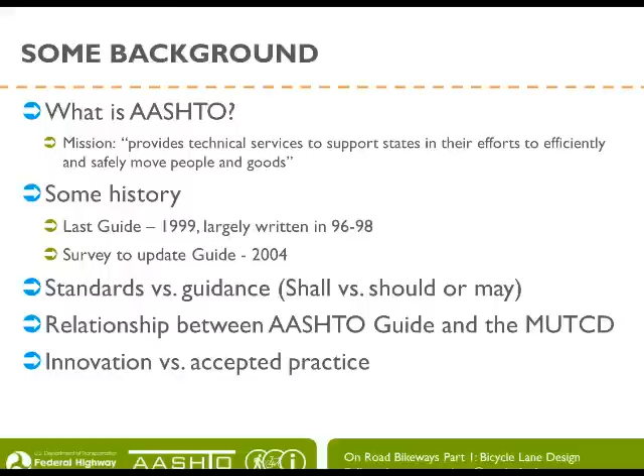So it's really important to note that the bike guide is guidance as opposed to a standard. The bike guide does not use words like shall, it uses words like should or may, and that's a very important distinction. The AASHTO guide also is closely linked to the MUTCD, and it's very important that the AASHTO guide does not get out in front of the MUTCD and instead refers to devices that are already included in the MUTCD. And finally, it's also important to note that due to the nature of AASHTO, it's important that the guide apply to a wide variety of contexts.

So we can also look at how the Bike Guide relates to other manuals. As I mentioned, signs, signals, and pavement marking information in the latest edition of the MUTCD related to bikeways have been incorporated into the 2012 AASHTO Bike Guide. So those two are compatible.

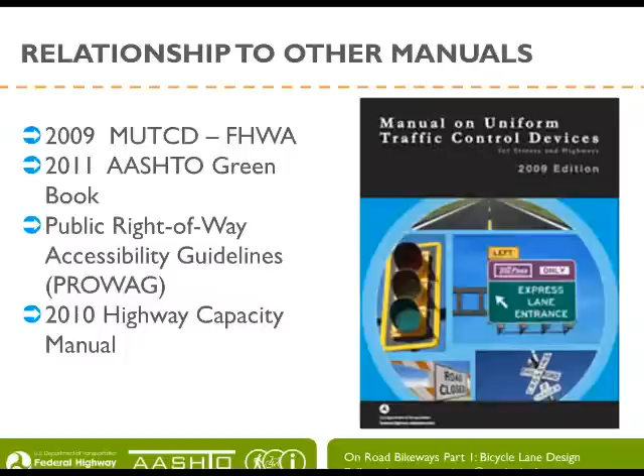The AASHTO Green Book in general refers to the Bike Guide for bicycle-specific guidance. In terms of accessibility, the new PROWAG guidelines have also been incorporated into the 2012 Bike Guide. And the Highway Capacity Manual includes new multimodal level of service, including bicycle level of service, that is also reflected in the Bike Guide.

So another question is, how does the AASHTO Bike Guide relate to the NACTO Bike Guide? I'll make a couple of points. The first is that the AASHTO Guide is a comprehensive manual. It covers all aspects of bicycle planning and design, both on-road and off-road bikeways, including fundamental operating characteristics of bicyclists and geometric design. The NACTO Guide is not intended to be a comprehensive guide for geometric design of bikeways.

Just one example of the difference is that the AASHTO Guide explains in detail how to calculate stopping sight distance for bicyclists. The NACTO Guide does not include this. And calculating stopping sight distance is a fundamental operating characteristic that any engineer must know in order to design a bikeway, including innovative facilities like cycle tracks.

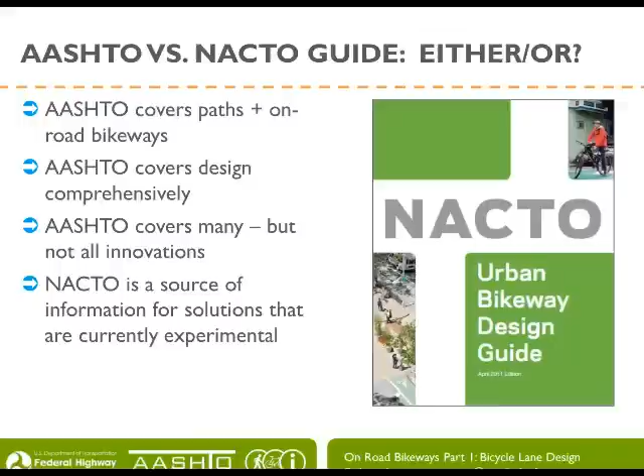Rather than focusing on all types of bikeways, the NACTO Guide covers certain types of on-road bikeway designs, specifically bike lanes and other new and innovative types of on-street bikeway treatments. The NACTO Guide does not cover shared use paths, signal design, and many other relevant topics. So it's not really a question of either or. Cities looking to build innovative bikeway designs correctly should use both guides.

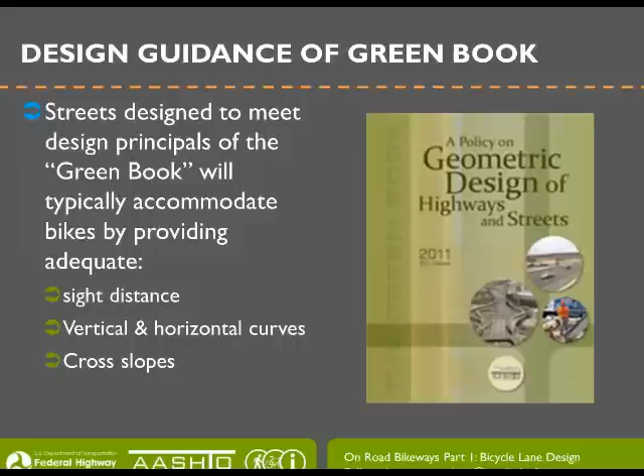Just a quick reference to the AASHTO Green Book: streets that are designed to meet the basic design principles of the Green Book will generally accommodate bikes by providing adequate sight distance, vertical and horizontal curves, as well as cross slopes. That's the picture of the cover of the current AASHTO Green Book.

I just want to give a few basic definitions that we'll be referring to, where the Bike Guide draws from the MUTCD. These definitions are important for our discussion today on bike lane types.

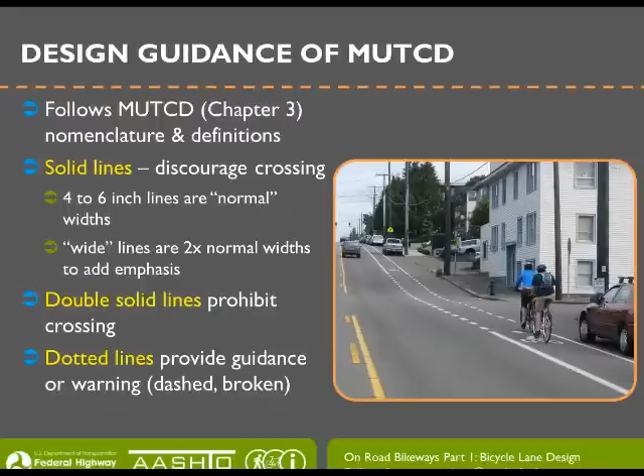So I want to talk about the different types of lines that we use to design bike lanes with. Solid lines discourage crossing. Generally, their 4 to 6 inch lines are considered normal width. Wider lines are generally 2 times normal width, and they can be used to add emphasis. Double solid lines prohibit crossing. And then finally, dotted lines provide guidance or warning where crossing may occur.

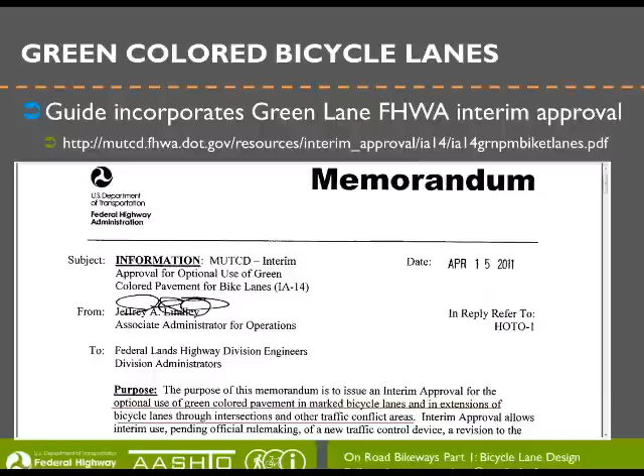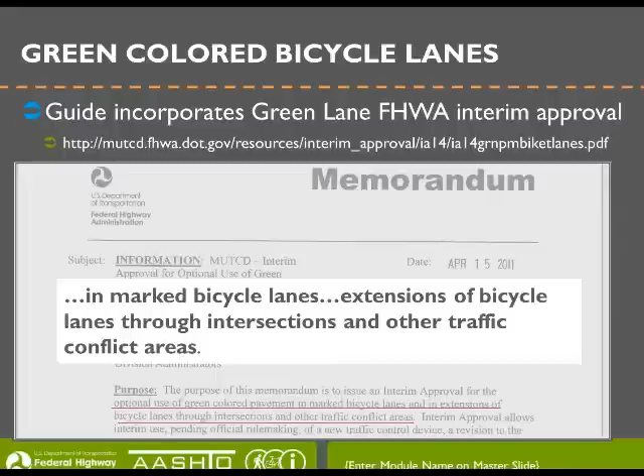A quick mention of green-colored bicycle lanes. The AASHTO Bike Guide, in addition to including items in the MUTCD, also includes items that have received interim approval from the FHWA, and that includes green bike lanes. This is a screenshot of the memo giving interim approval to the use of green color in bike lanes. It notes that in marked bicycle lanes, and extensions of bike lanes through intersections and other traffic conflict areas, green colored pavement may be used. That's an important note that the AASHTO Guide includes green colored pavement, and we'll talk more about that use in a moment.

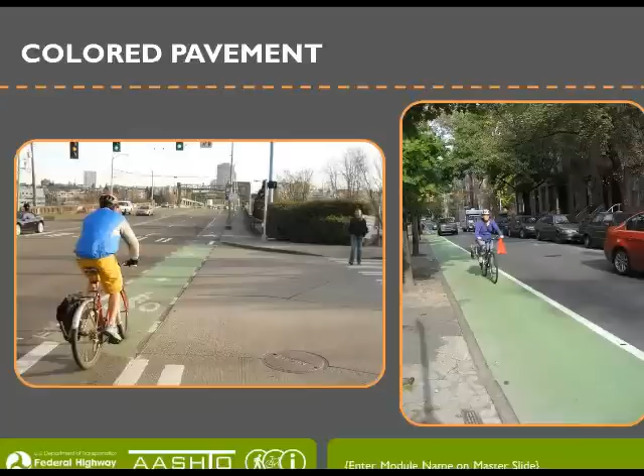So here are two examples of how green colored pavement can be used. On the left, we see the use of green pavement to highlight the extension of a bike lane through an intersection where there are conflicts. On the right, we see a full bike lane drawn in the color green, which can be useful where there is a concern about parking in the bike lane.

I'd like to give a summary of the major content changes in Chapter 4, with a focus on new bike lane content. The guide includes extensive discussion of the value of bike lanes. There's also much discussion of determining bike lane width and the nuances of when to use different widths, which we will go into detail later in the presentation. Climbing lanes are also included, along with a discussion of on-street parking, intersection guidance, as well as retrofit strategies.

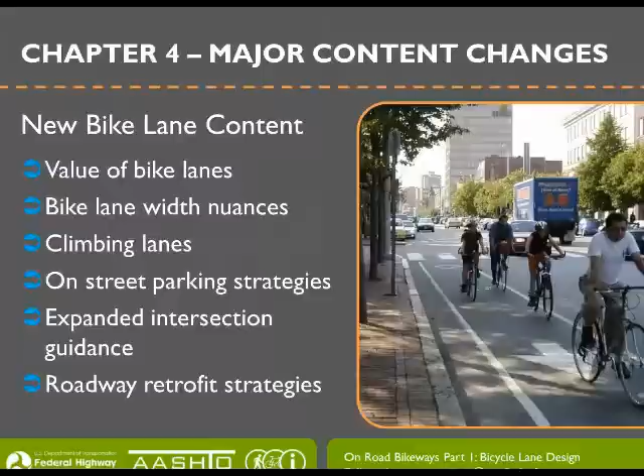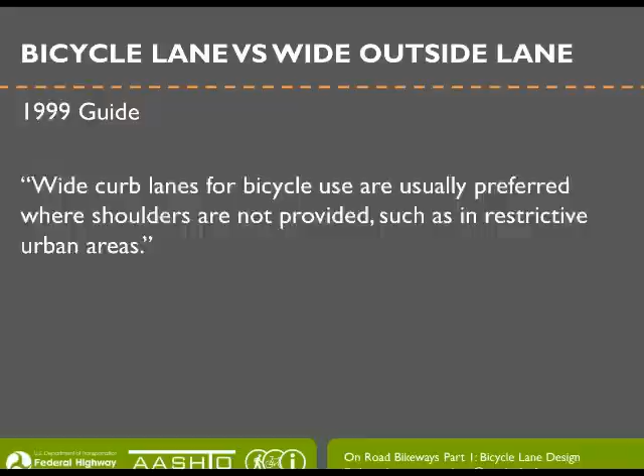So one important change I'd like to highlight regarding bike lanes: the 1999 guide included a statement often seen as a stated preference for wide curb lanes over other types of facilities. Compare that to the current guide, which includes two statements. The first recognizes that wider curb lanes can often increase motorist speed, which can be detrimental to level of service for both bicyclists and pedestrians. It also states that bike lanes are the appropriate and preferred bicycle facility for thoroughfares in both urban and suburban areas. This is a significant change in the guide.

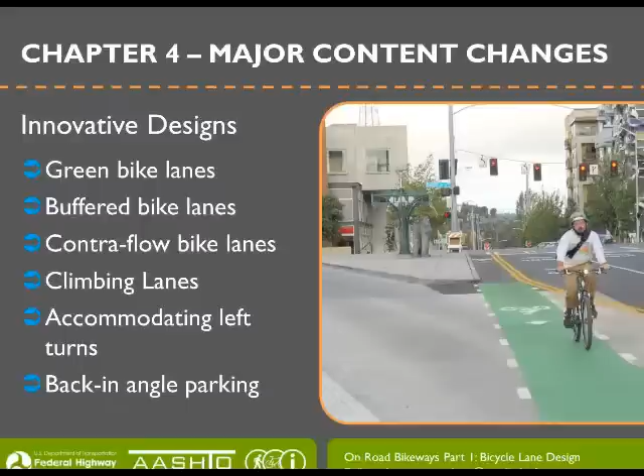Some of the major content changes in the current bike guide include other innovative designs. I've mentioned green bike lanes. It also includes discussion of buffered bike lanes, contra-flow lanes, climbing lanes, accommodating left turns for bicyclists, and designing bike lanes around angled parking.

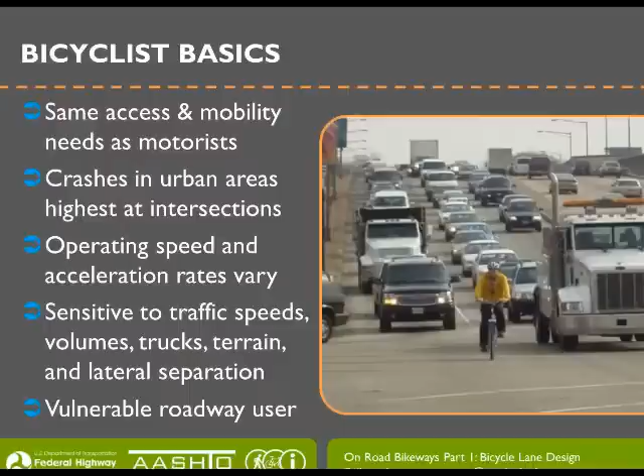The chapter begins with a discussion of some of the basics for bicyclists and how that impacts design decisions. I want to highlight some key points the guide covers. First, bicyclists have the same access and mobility needs as motorists. We also acknowledge that crashes in urban areas are highest at intersections. Bicyclists vary in operating speeds and acceleration rates, differing significantly from other types of road users. They are also very sensitive to traffic speeds, volumes, and different terrain conditions, so lateral separation—the amount of separation from conflict—is very important. Finally, bicyclists are vulnerable roadway users, and that needs to be taken into account when designing on-street bicycle facilities.

Taking that information—some of the basics of bicycle lane design—bike lanes allow cyclists to choose their own operating speed. As mentioned before, they are preferred over shared or wide outside lanes. Bicyclists also prefer bike lane continuity, and finally, they are sensitive to adjacent traffic volumes and speeds. That sensitivity needs to be taken into account when designing facilities.

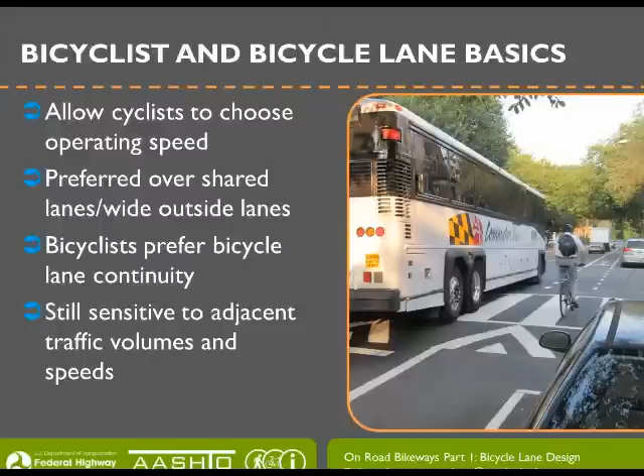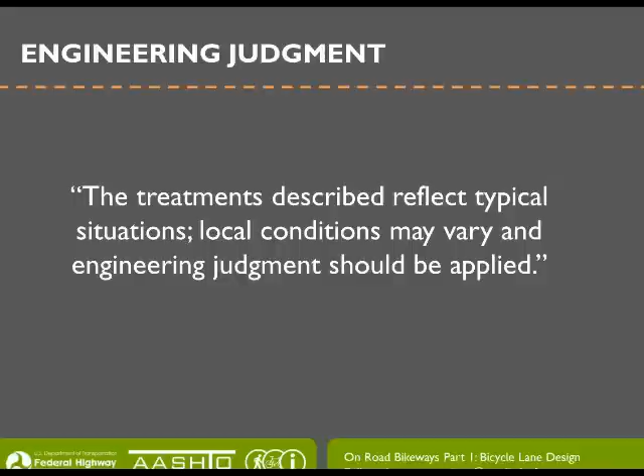It's important that Nick mentioned at the beginning that this is a guideline, not meant to be a standard. Any guideline cannot possibly detail out all the various scenarios encountered in the real-world roadway environment. As such, engineering judgment is critical to develop appropriate context-based solutions under a variety of situations. So the purpose of the guide is to provide overarching principles that, when you encounter unique situations, you can apply to develop unique solutions.

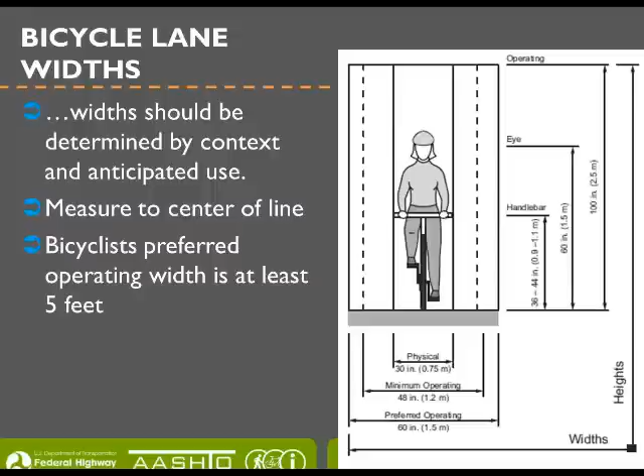The first and foremost question is the width of bike lanes. Width should really be a context-based decision, and the measurement is to the center of the line. The preferred bicyclist operating width is at least 5 feet, illustrated in this graphic from Chapter 2. It's important that the guide be read in its entire context, considering the operations of the cyclist and how they fit into the roadway environment. We discussed that chapter at the last webinar.

This is a new graphic in the guide, an update of the older graphic that just showed bike lane widths in various contexts. An important point here is that we're showing different dimensions for parking lanes and bicycle lane widths, reinforcing the notion that solutions should be context-based, and that it's not always necessary to have a 5-foot bike lane or 8-foot parking.

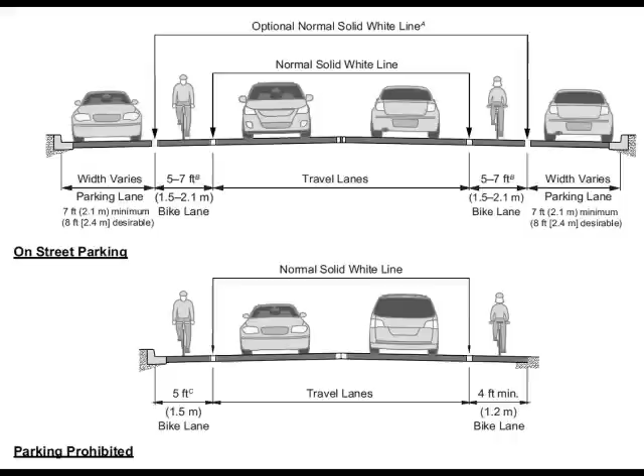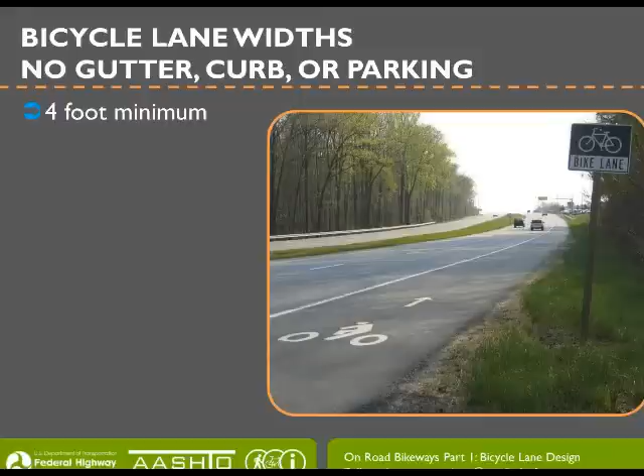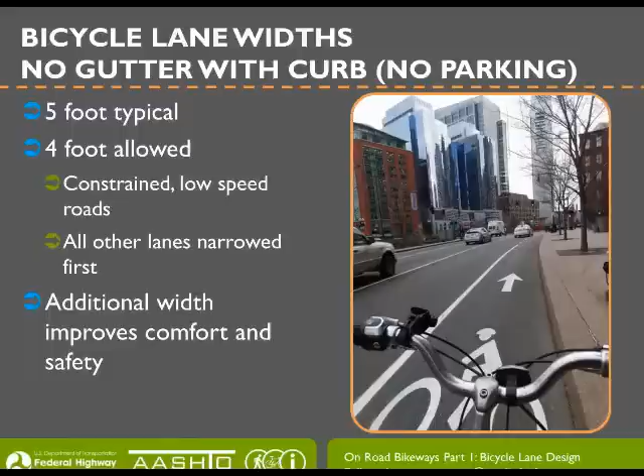I'm going to walk through the various scenarios you'd consider for bike lane widths. First, an open section roadway with no gutter and no curb—in those situations, the bike lane should be 4-foot minimum. Under scenarios where there's no gutter but there is a curb line and no parking, the bike lane should typically be 5 feet wide. Under very constrained situations where all other travel lanes have been narrowed, the guide allows for a 4-foot bicycle lane, again where there's no gutter line. The guide also makes frequent references to the value of additional width to improve comfort and safety for bicyclists.

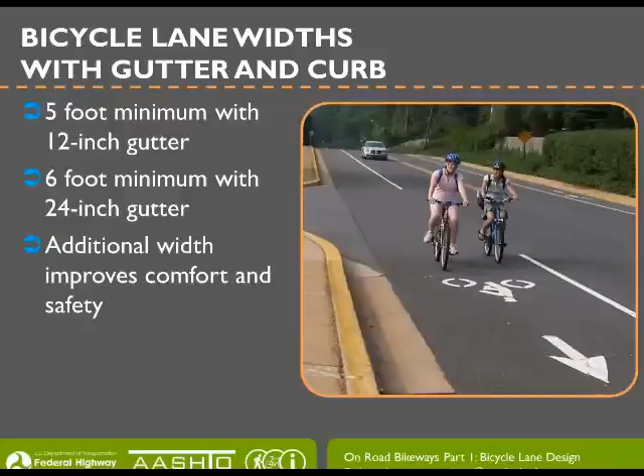The next iteration to consider is a bicycle lane against the curb where there is a gutter line. There are two common situations throughout the United States. The first is a 12-inch, or 1-foot, wide gutter pan—in that case, the guide recommends 4 feet of clear width to the left of the gutter, for a 5-foot total width measured from the face of the curb to the center line of the bike lane stripe. The second common situation is a 2-foot gutter pan, where the guide recommends a minimum 6-foot bike lane width. Again, additional width can be beneficial.

Whenever you have a bike lane against a curb line, there's often drainage structures and conveyance systems. The bike guide speaks to this in a couple of different sections, but as it relates to bicycle lanes, it makes a couple statements that it's important to consider that usable width between the gutter line and the bicycle lane stripe, and that usable width should be 4 feet clear.

It also talks a lot about the effect that a drainage grate can have on the bicycle rider, and that they may be inclined to swerve around it to avoid it, and that again is a reason for striving for a 4-foot clear width between the edge of the drainage grate and the bike lane line.

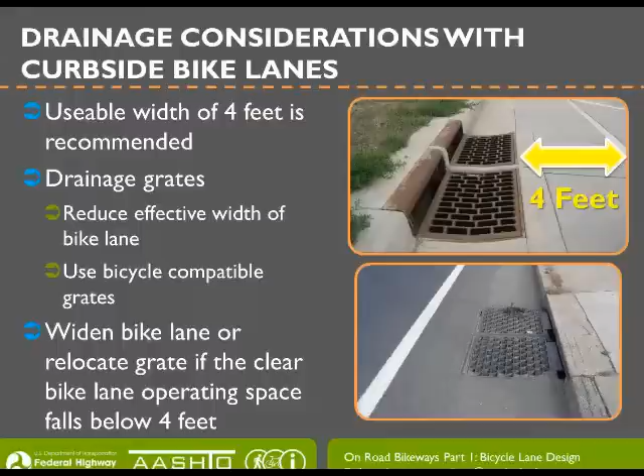And lastly, the critical point is to make sure that you have drainage grates that are compatible in the event cyclists do ride over them or have to ride over them. And in the event that you're doing some planning or design, it makes statements that every effort should be made to relocate drainage basins out of the bicycle lane or to retrofit the grate.

The next very common scenario is a bicycle lane adjacent to parking. For the old guide, the bike lane width at a minimum continues to be 5 feet, but now there's some additional discussion that I think is a little more clear than the old guide. The old guide allowed wider bike lanes, but it kind of referenced it in a non-direct manner.

Now it's a lot more direct in suggesting that 6 or 7 foot wide bicycle lane is preferable when you're adjacent to high turnover parking. It suggests that wider lanes are definitely important for the bicyclist safety, and that you can also narrow the parking lane to 7 feet.

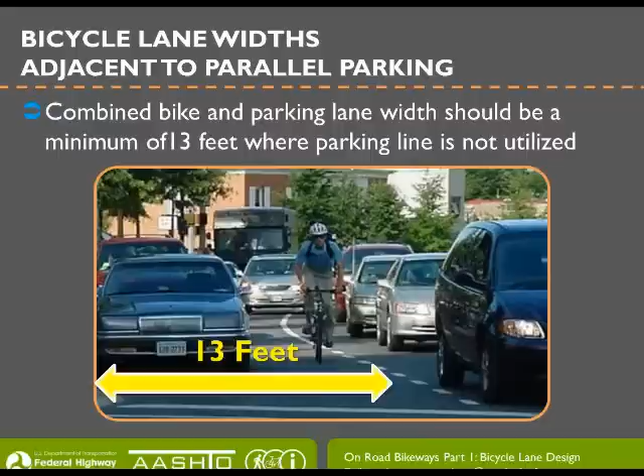A little bit of nuance with this is when you have a combined bike and parking lane where you don't mark the parking lane line, it suggests a minimum distance of 13 feet measured from face of curb to the center of the bike lane stripe.

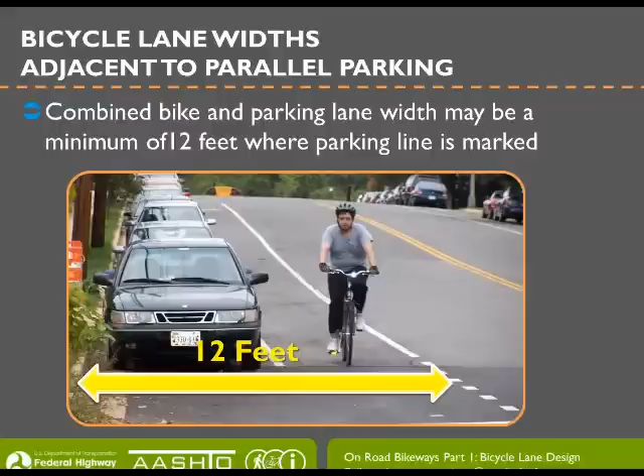In situations where the parking turnover is much lower, the bike guide still allows you to mark that line at 12 feet. It also makes an allowance for marking the line at 12 feet if you mark the parking lane at 7 feet.

The guide, for the first time, has some discussion relevant to dooring in narrow bike lanes next to narrow parking lanes. It's a concern that's of importance, especially in urban areas where it could be a crash type that can cause serious injury or even fatalities for cyclists when a motorist opens their parked car door into a moving bicyclist.

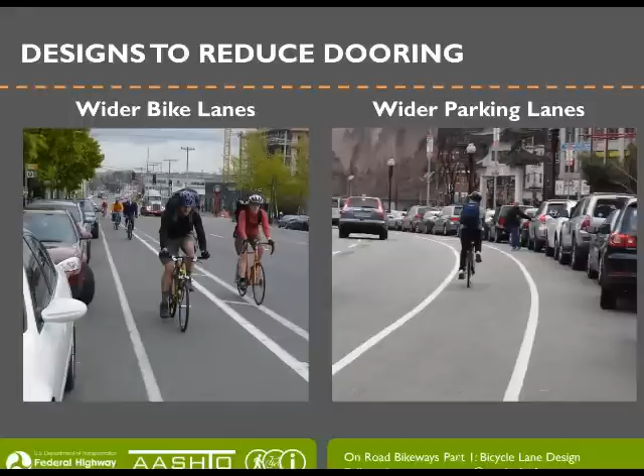The guide suggests a number of different strategies for mitigating this concern, one being wider bike lanes is acceptable. A second strategy is to widen the parking lane. The photograph on the left-hand side shows a wider bike lane inclusive of that buffer, where cyclists have the ability to function anywhere in that space. The picture on the right-hand side shows a much wider, 10-foot wide or more parking lane, where the bike lane is striped to the left of that.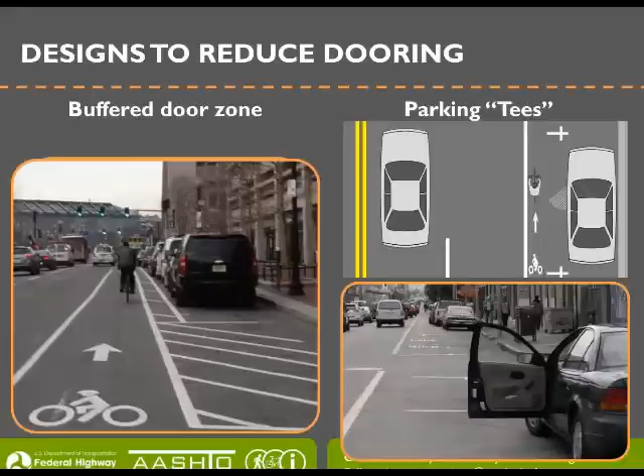Other options discussed in the guide are to add a buffer to the door zone itself, the space between the bicycle lane and the parking lane, as shown in the photograph on the left-hand side. Yet another option, based on some research from San Francisco, was to take a standard parking tee and extend it out like a cross into the bike lane to the width of the potentially opening door, as shown in the photograph at the bottom right.

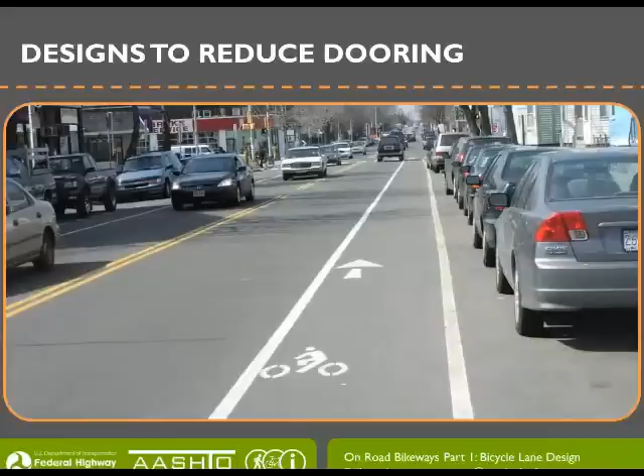Another option put out in the guide is the use of narrower bicycle lane symbols, as shown in this photograph, which are a little bit smaller and positioned on the left-hand side of the bicycle lane to encourage cyclists to ride closer to the left edge of the bike lane line.

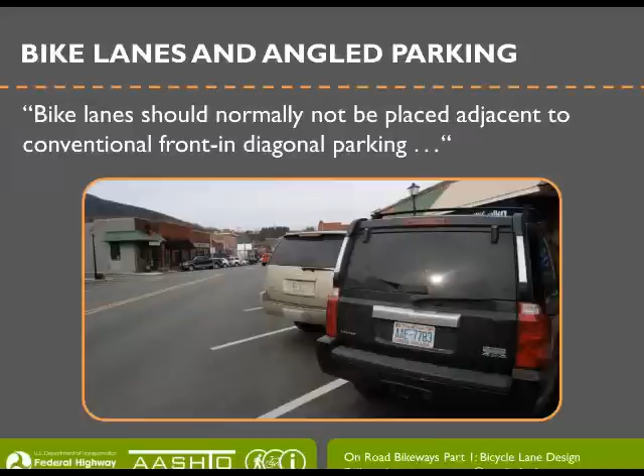The AASHTO Bike Guide has expanded discussion on bike lanes adjacent to angled parking. It states fairly strongly that bike lanes should not normally be placed adjacent to conventional front-in angled parking, primarily because sight lines are not very good between a motorist backing out of the parking space and the cyclist. Additionally, it can be difficult for the cyclist to see a motor vehicle blocked by another vehicle backing out, potentially resulting in a collision.

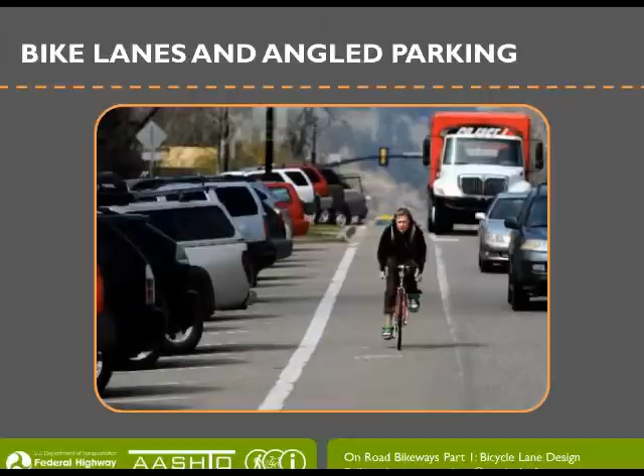That said, it doesn't prohibit the use and marking of bike lanes next to front-in angled parking. This photograph is a good example of a bike lane with front-in angled parking that is buffered away from the parked cars,

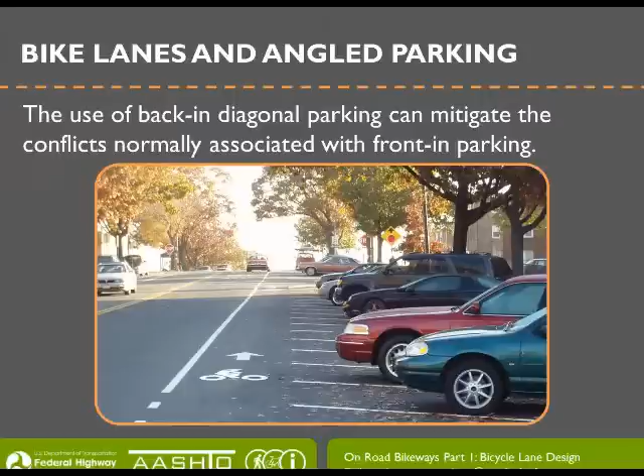and in a slightly wider bicycle lane to create more space for both parties to operate. The bike guide suggests using back-in diagonal parking to mitigate the conflicts normally associated with front-in angle parking, recommending it as a preferable design. It also highlights reasons back-in angle parking is beneficial to both motorists and pedestrians.

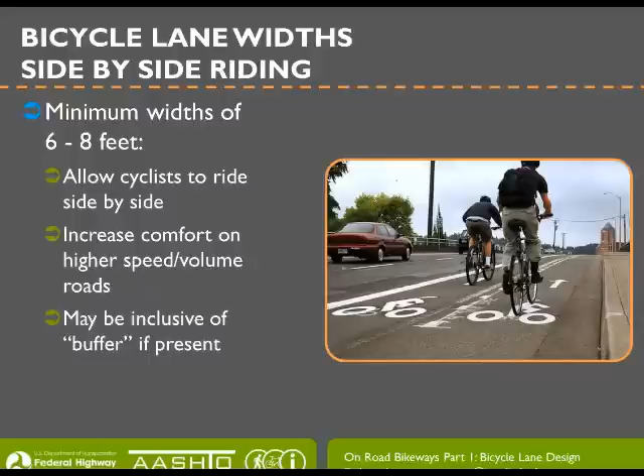The Bicycle Guide also has a lot of discussion on wider bike lanes and their value. It suggests minimum widths between 6 and 8 feet are necessary for circumstances where you want to accommodate side-by-side bicycle riding, or to create space for a cyclist to pass another and remain within the bicycle lane. These are suggested minimums, and obviously you could have wider lanes, as done in numerous cities throughout the US. A wider lane accommodating higher use also improves comfort for cyclists by adding buffering between adjacent travel lanes.

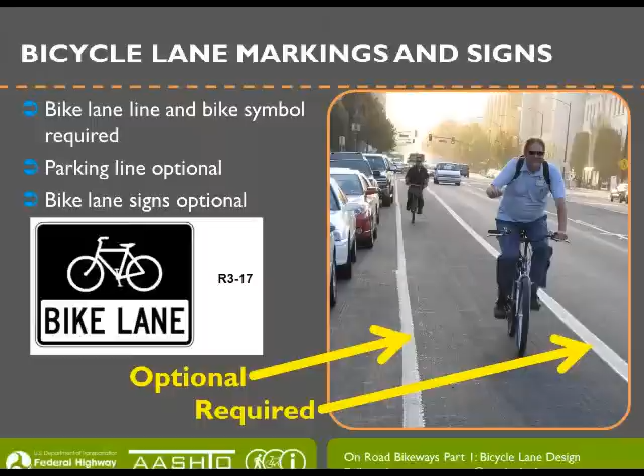Bicycle lane symbols are still required to mark bicycle lanes. The sign reflecting the updated MUTCD is not required - it's an optional element. Similar to the 1999 guide, the parking lane line is an optional treatment that may or may not be used to mark the bicycle lane, consistent with some of the early examples shown.

Some jurisdictions, with state or local laws, have requirements to enforce no parking, stopping, or standing in bicycle lanes that must be posted on signs. In those jurisdictions it may be necessary to post no parking signs in bike lanes to allow enforcement to occur. So it's always critical to become familiar with local laws before you begin bike lane design.

Both symbols remain in the guide - the bicycle symbol and the bicycle with rider symbol. You also have the option, per the MUTCD, to not use either symbol but instead use the words 'bike lane'. There's a bit more discussion on the nuance of spacing and placing the symbols - they may be placed anywhere from 100 to 1,000 feet apart, depending on context.

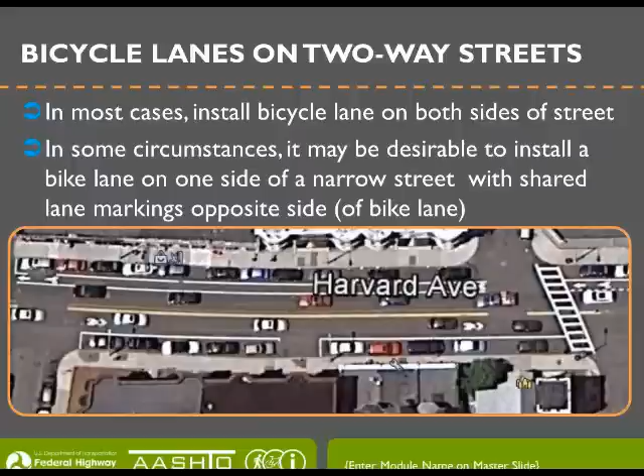Bicycle lanes on two-way streets are generally recommended to be installed on both sides, in the same direction as traffic. In some circumstances, the guide now discusses examples where it may be desirable to have a bike lane on a narrower street in one direction, and a shared lane marking in the opposite direction. This is typical in a dense network of parallel grid streets, where you might have a bike lane pair system.

Another example of applying a bike lane only on one side is in situations with very steep hills, such as this one in Seattle, where it could be beneficial to install a bike lane in the uphill direction even if the street is a bit narrow. This allows a cyclist moving substantially slower than normal to have additional room to operate comfortably, without feeling pressure that they're impeding traffic and need to pull over. It creates a more comfortable environment for them to work up the hill at their own pace.

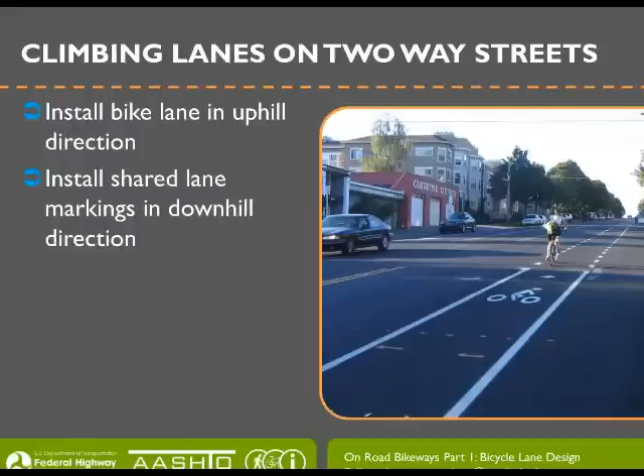In the downhill direction, it's advisable to install a shared lane marking to ensure that bicyclists are operating the facility in the same direction as traffic in both directions.

Bicycle lanes on one-way streets generally should be on the right-hand side of the roadway. However, the guide talks about scenarios where it could be beneficial to have a bicycle lane on the left-hand side, as shown in this photograph.

These are typically locations where there may be high volumes of left-turning cyclists, or situations where analysis determines substantial truck loading on the right-hand curb side, a lot of transit stops with heavy headways, and a lot of conflicts between cyclists and transit buses. We also see high volumes of right-turning vehicles, or concerns such as this where putting a bicycle lane on the left-hand side could mitigate or reduce the incidence of potential dooring. That applies whether parking is restricted on the left-hand side or present.

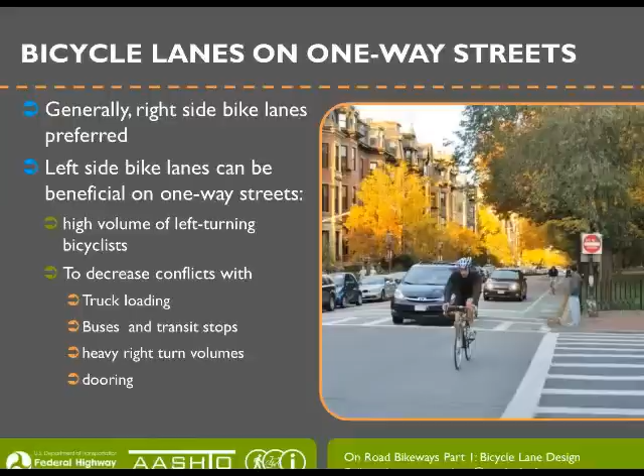Now, when you think about the fact that the majority of motorists today driving around the United States are single-occupant vehicles, the door on the passenger side is opening much less. So a mitigation for dooring could potentially be to locate a bike lane on the left-hand side of the roadway.

Contra-flow bike lanes are another new addition to the bike guide. They should always be placed on the right-hand side of the road, in the same direction as they would normally be if you had a two-way street with traffic on both sides. So typically a contra-flow lane is installed on a one-way street that's made two-way just for bicyclists.

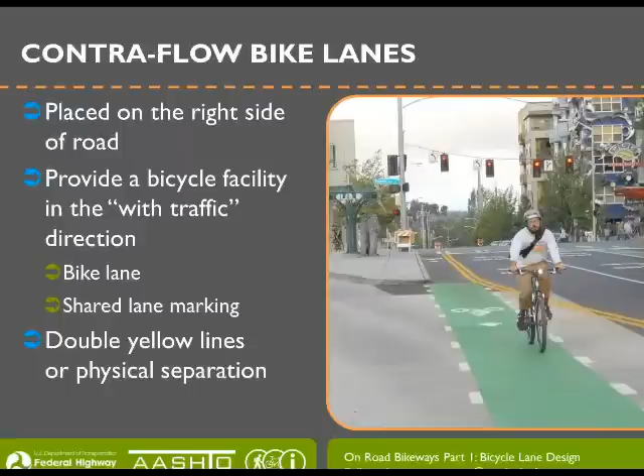As shown in this photograph, generally they should provide a bicycle lane that's separated with a double yellow line to denote that separation between the opposing directions of traffic, as you see in this photograph. The opposite direction of the street with traffic may ideally have a bicycle lane, but if not, should be marked with shared lane markings.

To make a contra-flow bike lane, it's also necessary and important to consider the intersections. Typically, they should all have do not enter signs for the motorists, so it's important to add an exception for the bicyclists so that their movement is legal.

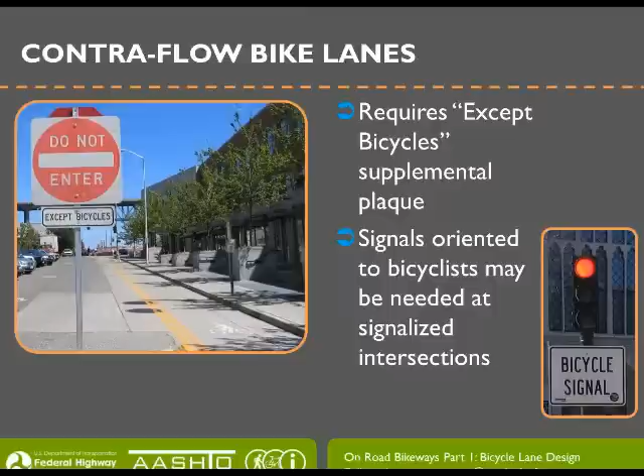It also may be necessary to evaluate traffic signals. In some cases, there may be no traffic signal that faces the contra-flow direction, so it may be necessary to install a signal such as this bicycle signal, or to reorient existing traffic signals so that it's visible to the cyclist in the contra-flow direction.

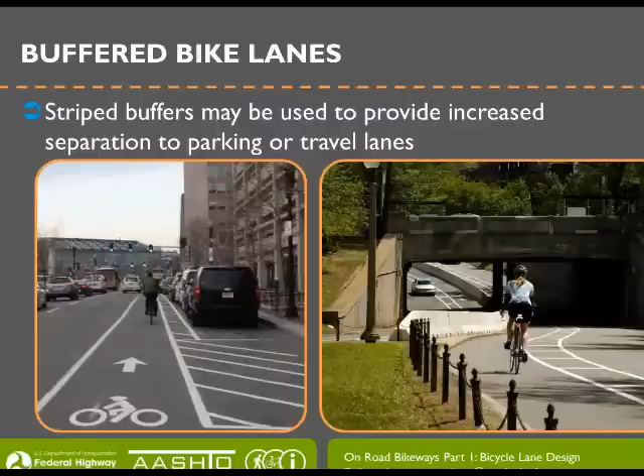This guide also now talks about buffered bike lanes and their benefits of increasing safety and comfort for the bicyclist. It allows the option to place the buffer between the bicyclist and the parking lane, as I talked about earlier, to address dooring concerns, or to add additional separation between the passing motorist and the bicyclist to increase their comfort. There are two examples shown in the photograph of those different scenarios.

Bicycle lanes at intersections. This section's discussion has been increased quite a bit from the last guide, but it's based on general principles of minimizing free-flowing vehicular movements that cross the bicycle traffic flow. Consider, as shown in this graphic from Chapter 3, typical maneuvers a cyclist may make to make a left-hand turn. There are generally three ways a cyclist would make that maneuver.

Good design also provides adequate guidance to both the bicyclist and the motorist approaching and through the intersection. Everything that's out there should be direct and logical, and all traffic signals should accommodate not only the motorist, but should fully accommodate the bicyclist in detection and timing. We'll discuss that more at the next webinar.

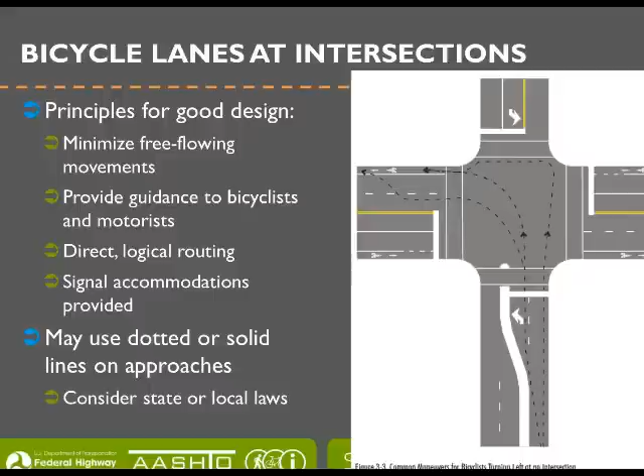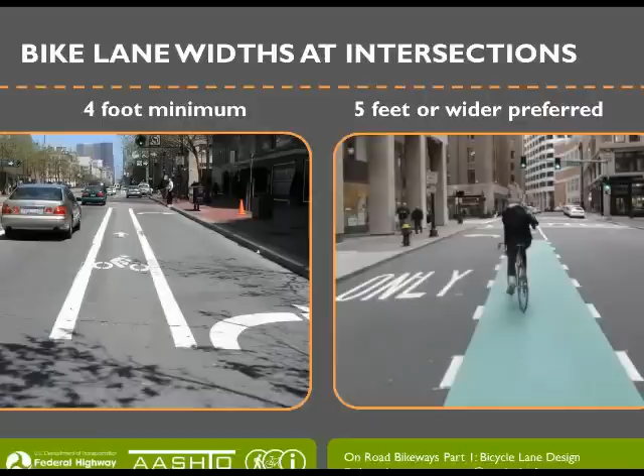You also have the option to use dotted or solid lines, and a lot of that is reflective of your state and local practice and your state and local laws. Bike lane widths at intersections may vary. They may be as narrow as 4 feet between turn lanes and adjacent through lanes, but ideally they would be wider. Bike lanes between moving lanes of traffic should be wider, as shown in the example at the right. Also, per the guidance, they may be colored green.

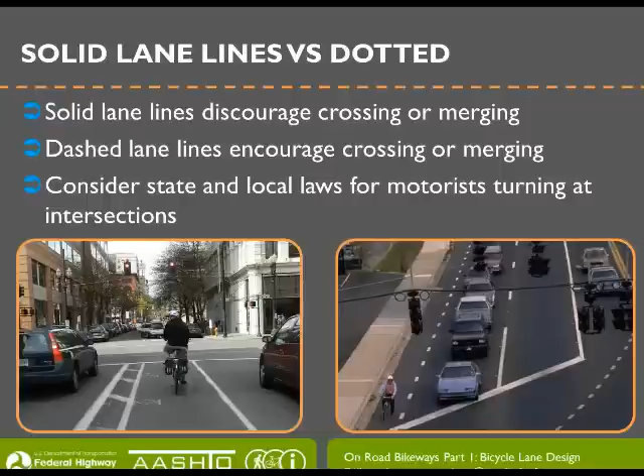Solid lane lines, as Nick discussed earlier from the MUTCD, discourage a motorist from entering or crossing the line. Dash lane lines encourage crossing or merging. These designs should be used to emphasize the design objectives of your local community.

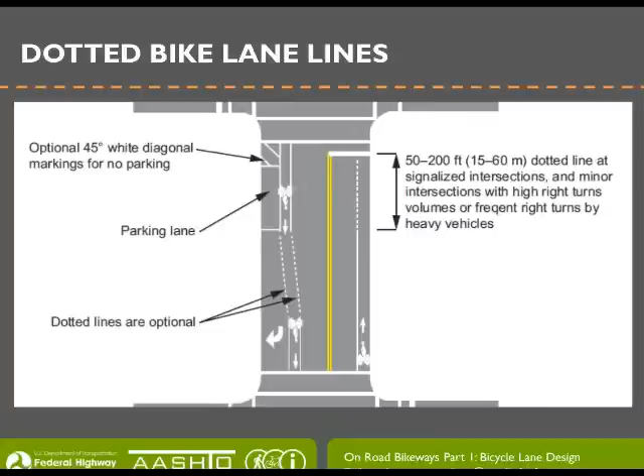The guidance discusses, similar to the last guide, some flexibility in the length of dotting or dashing on the approach to an intersection. That varies anywhere from 50 to 200 feet, and it may be a decision based on the prevailing motor vehicle speeds and the land use context. So in a more urban area, with dense streets and low speeds, the dash spacing may be smaller in your local community, whereas on a suburban highway, it may be more desirable for that dotted line to be much longer.

Solid lines should normally be marked solid across alleys and driveways. It's not necessary to dot them at all of those—it's again a context decision. If you have high volumes of traffic turning into driveways, and they're more equivalent to a street, it may be desirable to dot those in those scenarios.

For right turn lanes, the bike lane may be dotted, may be solid all the way to the intersection, or it may be dropped completely. Generally, the guide speaks to maintaining bike lanes up to intersections and not dropping them, and it discourages the striping of right turn and through, or through and right turn option lanes, where you would typically drop a bike lane in that situation. The decision of whether to make it solid or dotted is really a context of the volume of turning vehicles, whether there's bus stops, and your state and local law. An important element of these designs is the inclusion of the right turn lane yield to bike sign at the beginning of the right turn lane.

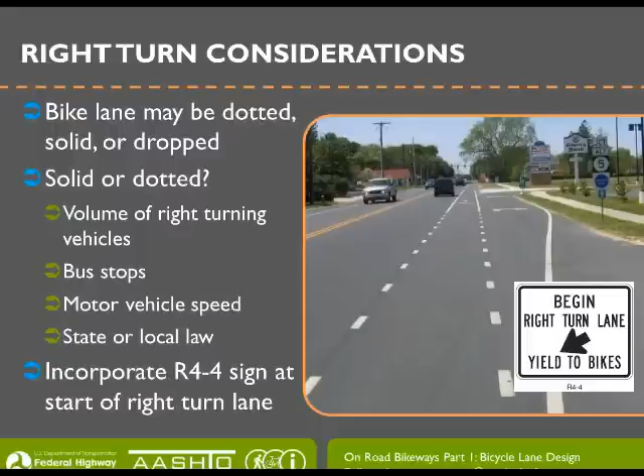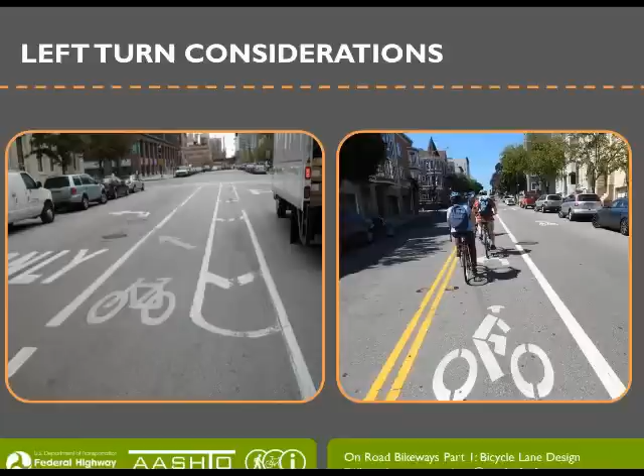For left turns, there's also additional discussion about providing for cyclists with their own bicycle lane, their own space. The same principles of width apply, but it's again a context decision for where you have higher volumes of left turning cyclists, a T intersection, or a particular movement that is advisable to accommodate. Here are two examples where they have their own space for a left turn only lane on the right hand side, and the picture on the left hand side actually creates a bit of a buffer. So you have situations where a cyclist is stopped and traffic is moving to their right, which may be at higher speed—it could be desirable to incorporate a buffer in those design situations.

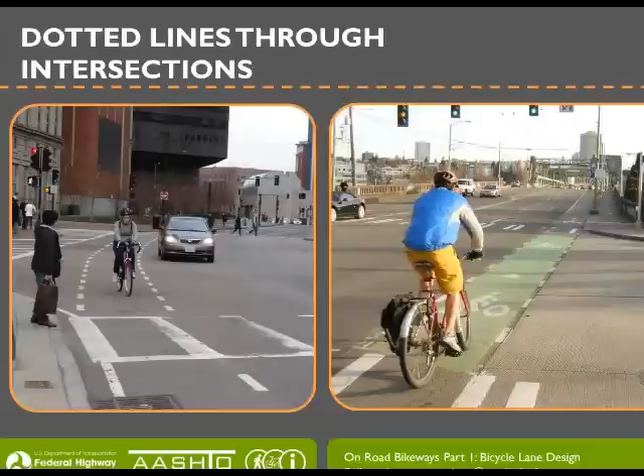Dotted lines are also discussed as being allowed to mark through intersections. This can be particularly beneficial with large intersections or geometry, such as the photo at the left, where the roadway is curving or complicated by multi-leg intersections, and it can otherwise be confusing to maintain your line of travel through the intersection. Dotted lines through intersections are allowed and encouraged, and the use of color and/or symbols is allowed in the guide, as you can see in the example on the right.

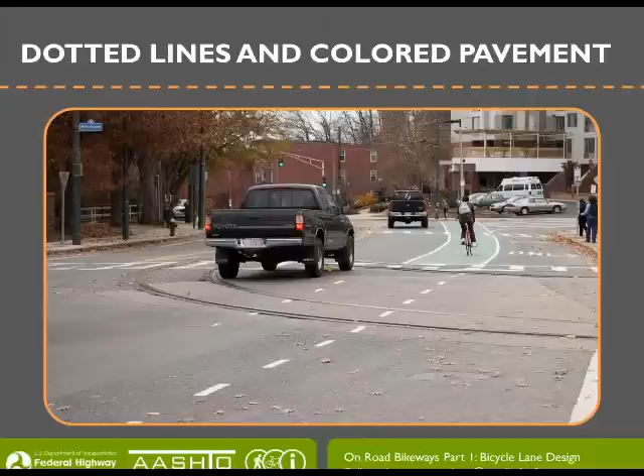Here's another example of the use of dotted lines. In this instance, dotted and colored lines are used to help clarify the space of the roadway—where motorists should be, where bicyclists should be. In this case, it helps align them as they cross the streetcar tracks at an angle, which reduces the likelihood of a bicyclist crash.

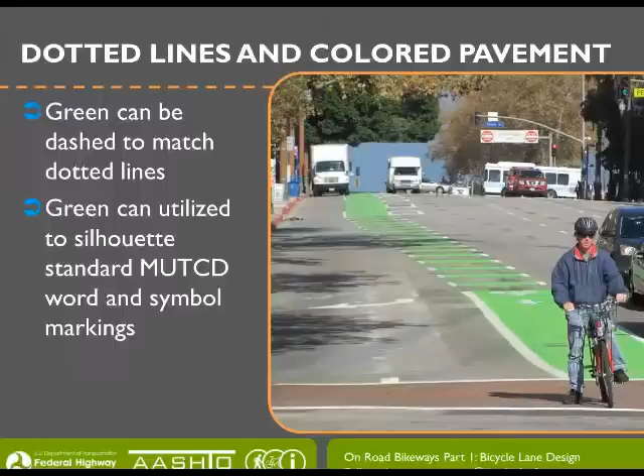With dotted lines and colored pavement combined, there's an option to actually dash the green to match the skip spacing of the dotted lines, as shown in this photograph. Colored green may also be used as a standalone in bike lanes, or anywhere symbols are used, to silhouette the bike lane symbol and increase its conspicuity to the approaching motorist. Lastly, for bus stops, it's recommended that, especially for higher volume bus stops, bike lanes be dotted through the entire length of bus stops, whether they be near side, far side, or mid-block.

Okay, thank you, Bill. This is Nick Jackson again, and I'm going to talk about a new section in the guide that focuses on retrofitting existing streets and highways for the accommodation of bicycles. This is a very important section because we recognize that it's not feasible or even desirable to widen roads to accommodate bicycles, so this new section talks about specific strategies to reallocate space for bicycles.

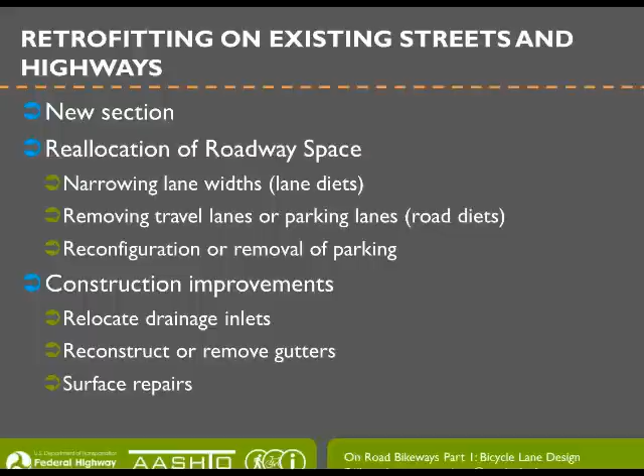There are really two basic strategies. One is the reallocation of roadway space, which includes narrowing lane widths, removing travel lanes or parking lanes, or reconfiguration or removal of on-street parking. The second key type of retrofit on existing streets or highways involves construction improvements, which looks primarily at how we improve the surface of the roadway for bicycle performance, including drainage grates and other structures and surface issues.

A road diet is a common term for reallocating road space, and there are two primary types of road diets. The first type is to reduce travel lane width. Travel lanes can be narrowed, and the space taken from travel lanes can be used to create space for bicycles in the form of bicycle lanes on streets.

The next strategy of a road diet is to reduce the number of travel lanes. The most common type we talk about is going from a 4-lane roadway, 2 lanes in each direction, to a 3-lane roadway, often with a center lane that can be used for turn lanes or to provide refuge for pedestrian crossings. The AASHTO Bike Guide is actually the first AASHTO publication to talk explicitly about road diets and some of the strategies for implementing them, providing basic guidelines looking at the volumes of vehicle traffic on a roadway, for a typical 4-lane roadway, and what volume thresholds make good candidates for road diets.

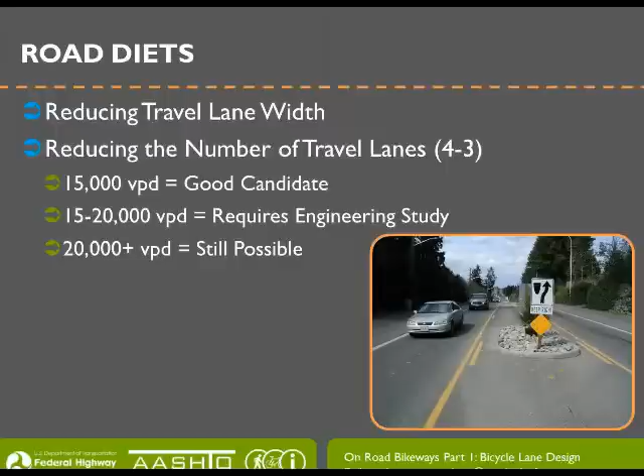Here you can see the range of values provided in the guide to help give a rule of thumb. It's very important to note that every roadway that needs to be reconfigured should be looked at, and an engineering analysis should be conducted to determine what's feasible in terms of reallocating that space. These are generally accepted rules of thumb for that approach.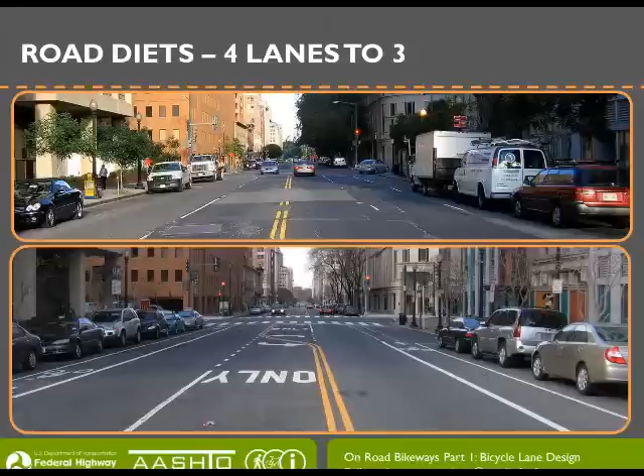So this is just a couple examples. This is a before and after photograph of a road diet. On the top, you see the road before, with 2 travel lanes in each direction. On the bottom, you can see the after. Now we have 1 travel lane in each direction, and the space taken away has been used to create a bicycle lane in each direction, as well as a center turn lane.

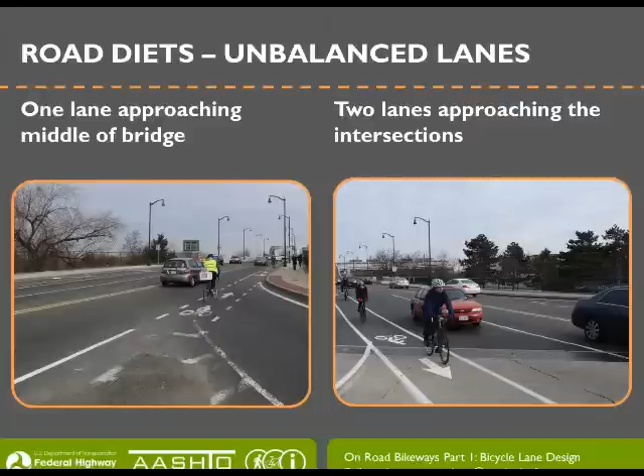Another example of a road diet is a situation where you have an unbalanced number of lanes. Based upon traffic engineering analysis, this may be appropriate in many areas. This is an example of a bridge where on one side you have 1 lane approaching the middle of the bridge, but you have 2 lanes approaching the intersection on either side. The unbalanced lanes work from a traffic engineering perspective and allow the creation of space for bicycle lanes.

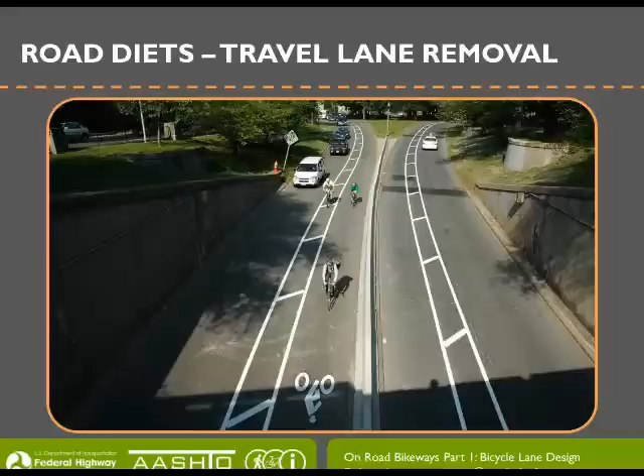This is another example of a road diet. It actually went from 4 lanes to 2 lanes. A travel lane was removed in each direction, and in this case, the excess space was used to create a dedicated bike lane as well as a buffer. As mentioned earlier, that buffer can be very useful, especially in situations where you have differing speeds. Here we have significant slope, bicyclists traveling at different speeds, and the buffer and the wide bike lane can help accommodate those uses.

Again, another example of simply removing a travel lane to create space for a bicycle lane. Here again, the extra space is used to create a buffer, and the buffer can be an important tool to increase the comfort of bicyclists, especially on roadways with higher traffic speeds and higher volumes of traffic.

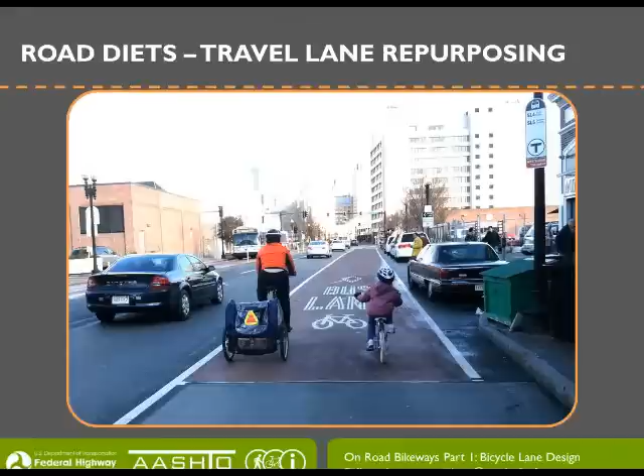Another type of road diet is to repurpose travel lanes. Here, travel lanes are converted to shared bike and bus lanes, which is another technique to reallocate road space to increase accommodations for bicyclists.

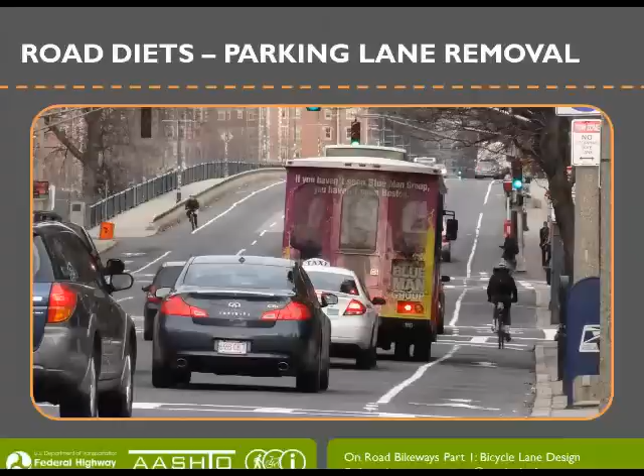And then the last technique is to remove a parking lane. This is an example of a street, Mass Ave in Boston. Parking was removed on one side of the street to create space for bicycle lanes, providing important continuity between jurisdictions. This was a very good improvement that tremendously increased the level of service for bicyclists.

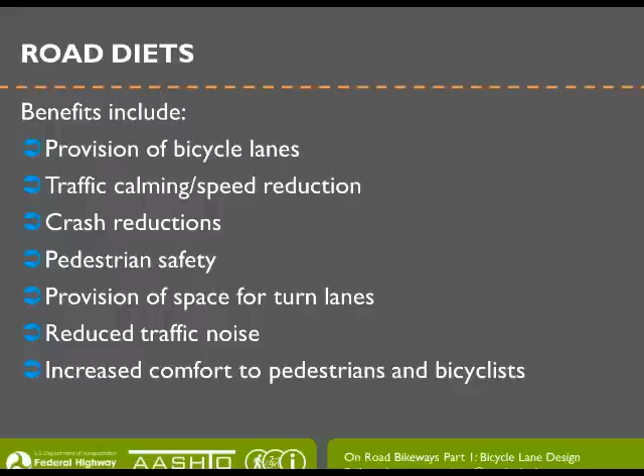So to summarize, there's a lot of discussion on road diets, and I think what's important about the guide is that it really talks about the benefits from a very broad perspective. It's not just to create space for bicycle lanes, but the road diet has benefits for other road users as well, in terms of lowering speeds, traffic calming, reducing crashes, but also improving conditions for pedestrians. As I showed earlier, the space can be used to create medians to improve pedestrian crossings. Also, operations can often be improved for motorists by creating space for dedicated turn lanes and reducing rear-end crashes.

The other technique I mentioned is simply narrowing travel lanes. A very important point to note about the AASHTO Bike Guide is that it cites the extensive research being done into lane width, and specifically mentions narrowing travel lanes on arterials to 10 feet. This is acceptable and a useful tool for accommodating bicyclists, but also does not negatively impact safety for other users. It's a very important strategy that is explicitly mentioned in the AASHTO Bike Guide.

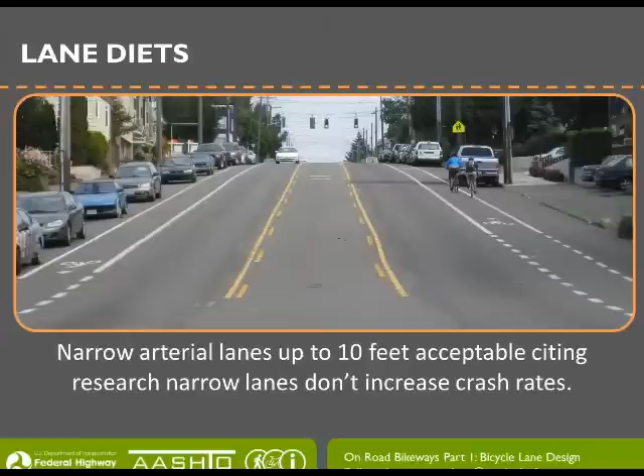You'll also want to note here that you can see the previous lane widths. You can see the grinding of the lines there. The lanes were removed adjacent to the center turn lane in this photograph.

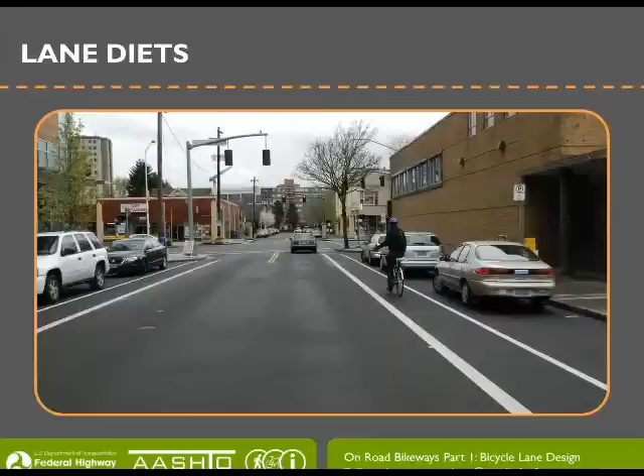When you do grind existing lanes, you want to be very careful that it's done well, so you don't create safety problems for bicyclists with uneven pavement.

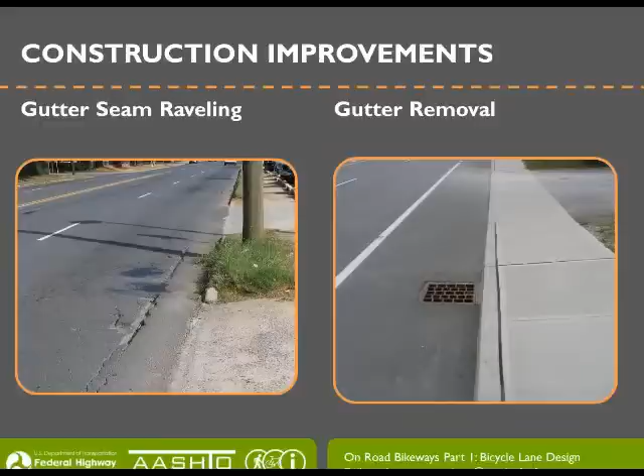On the right, we show a situation where an entire gutter has been removed and a bicycle-safe drainage grate has been installed. Again, it's important to refer back to the dimensions earlier that Bill discussed when considering these types of improvements.

Okay, I'm going to turn it back over to Bill Schultheiss to complete the presentation. Okay, so this review—

There's obviously a lot of content in the guide. We didn't discuss bike lanes at roundabouts and bridges. We're going to get into those scenarios a little bit at the next webinar, but again, the same principles of width and buffers apply in those scenarios.

I think it's important to understand, back to the beginning of the conversation, that this is a guideline. It's really not possible to cover all situations, and there's a lot of unique situations. So one situation you could look in the table of contents and look up is, how do I terminate a bike lane? You wouldn't find that heading in the guide. It's not explicitly in the guide as a topic.

That said, there's a lot of good guidance in the guide, and I'm going to walk you through how you apply the principles of the guide in the context of a very typical situation that frankly doesn't have a typical answer. This is the other aspect you need to remember with AASHTO: it's written by a state DOT organization, AASHTO, a compilation of cities, states, federal government, and it's meant to apply to the whole country.

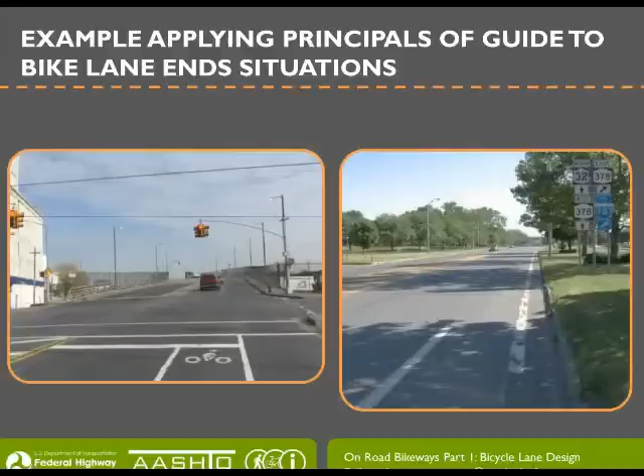So in this example, we have two pictures where a bike lane may terminate at an intersection, or it may terminate midstream, shown on the right. But thinking back to the principles of the guide, first and foremost: is it visible to the motorist and to the cyclist, or is it likely to be a surprise?

The first tool of good design is to try not to terminate these things where they're out of view or they would come upon either user as a surprise. In situations where you can't see them, it's advisable to have advance notice that the bike lane ends.

At the point of termination, you have another follow-on decision: should you mark it with shared lane markings? In many cases, it may be a good idea to do that. The other context is lane width.

So something that was developed, for example, in the city of Boston: in situations where a bike lane terminated on a wider lane, 14 feet or greater, that's generally considered a very shareable lane width. In those situations, a share-the-road sign is applied at the termination of the bike lane, and in certain circumstances, a shared lane marking accompanies that for a certain distance from the termination.

The other situation is the bike lane terminates into a narrow lane, less than 14 feet. In those situations, it's not really safe for a bicycle to operate adjacent to a motor vehicle—it's not shareable. In that case, it makes a lot of sense to apply the bicycles-may-use-full-lane sign, and again it may or may not be marked with a shared lane marking to emphasize that transition.

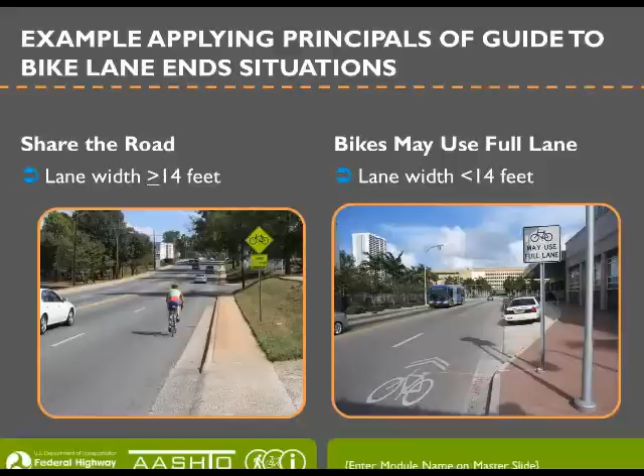So again, this is one example of many. We'd like to use that just to illustrate the concept of applying the principles of the guide, as explained in the guide, to a particular scenario that you may have in your jurisdiction.